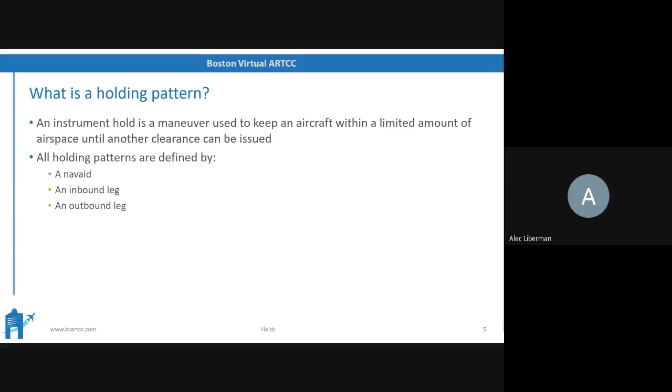Let's talk about the navaid. A navaid is a navaid like in any other kind of flying. A VOR, so a ground station, an NDB, another ground station, an intersection of two radials, a DME fix, an RNAV waypoint, all depending on what kind of equipment you may have. Generally speaking, holds for instructional purposes are depicted via a triangle, so that's what we're largely going to be using today.

Now let's talk about the inbound leg. The inbound leg is what all hold instructions are centered about. You always fly to the fix on the inbound leg. That should be pretty common sense. Inbound to, outbound away from. And the inbound leg is always the navigational guidance. And we'll talk about that in a few more slides as well.

The outbound leg, on the other hand, you're flying away from the fix. And this one you actually fly by dead reckoning. There's no navigational guidance. You have to guesstimate this one and then adjust for wind and time it properly so that you're always tracking the navigational guidance on the inbound leg. And we'll discuss how to do that in a few more slides.

Is it always on the right or on the left? Say again? I'm looking at traffic patterns. Usually they're on the left. So is this one always on the right, or it doesn't matter? So good question. We are going to talk about non-standard holds, but conversely to traffic patterns, standard holds are always flown with right turns, and non-standard holds, if specified left turns, then you fly them to the left. Otherwise, you can expect standard holds to be to the right. Okay. I don't have a reason for that. I don't know why, but that's just the way it is.

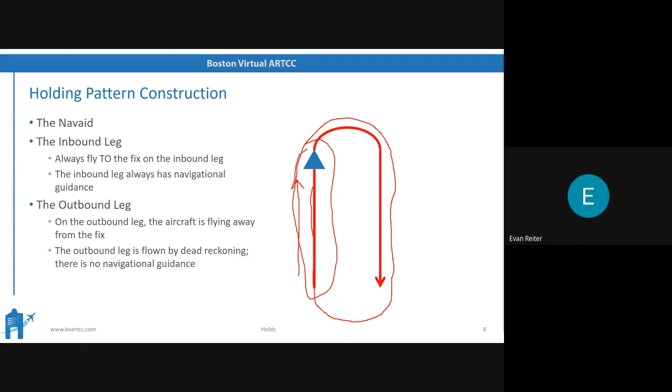And there are different techniques that we're going to cover in the next several slides that talk about how to pick that outbound heading so that you do end up on the exact inbound leg that you want to fly.

All right, let's talk about holding pattern specifications and the rules surrounding them. As Lane just mentioned, turn direction. Standard holds are flown to the right, and in the absence of any direction, you fly them to the right. Non-standard holds, ATC will specify a left turn, and we'll hear ATC instructions in a couple slides. Inbound time, so the inbound leg that Evan just mentioned, most often, especially for GA aircraft, it's 1 minute. Above 14,000 feet, 1.5 minutes.

And we have speed limits as well. Below 6,000 feet, you cannot fly above 200 knots, 6,000 to 14,000, not above 230, 14,000 and higher, not above 265. That's really only an issue for the airline world. I would be pretty concerned if I got a Cessna Skyhawk up to 200 knots.

And even in the airline world, what we hear quite commonly is airliners will just request their own speeds anyway. And as I said before, as a controller, certainly in the virtual world, it doesn't bother me what speed you're flying. So if I'm going to be flying into a hold, I'm going to just end up there to wait. There's no reason for me to go fast. I may as well slow down.

So typically, one of the first things that we'll do in the airline world when we hear you can expect to hold or here's a holding clearance for you is we'll just ask for speed our discretion right at that moment. And then I'll slow down to whatever a minimum safe clean speed is, because I'm just going to be sitting there burning gas anyway. I may as well try to eat up a little bit more time as I'm on the way to the fix. And again, I don't necessarily have any reason to be operating at 265 knots in most cases. So I might request speed my discretion and just go as slow as I practically can, or as I feel comfortable with doing, saving some gas and avoiding any additional time that I might be spending in the hold.

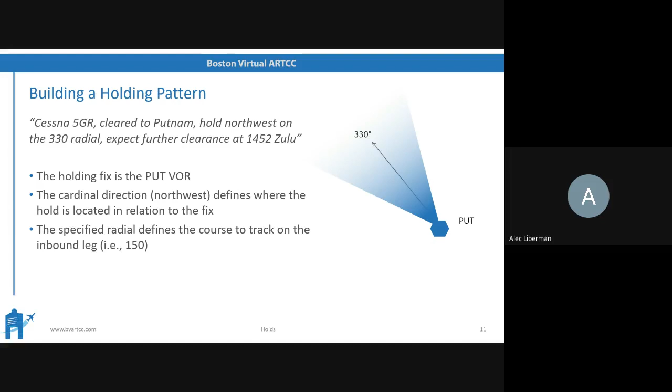Specifically, we know that the inbound leg is the 330 radial. Let me clarify that. If we know that the inbound leg is on the 330 radial, and we're always flying inbound to the nav aid, we know that the inbound heading, or excuse me, track must be 150. And in a no-wind scenario, the outbound heading is 330. In the absence of turn directions, right turns.

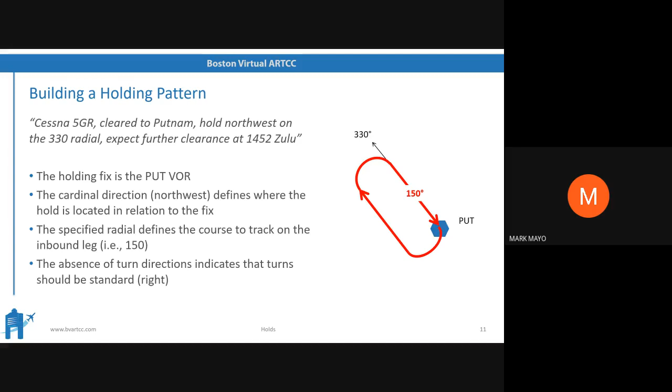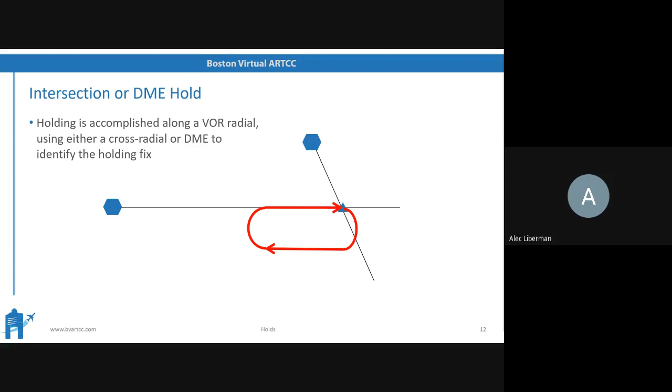Okay. Any further questions on this? If not, we'll move on to intersections or DME holds. This is largely the same principle as a nav aid hold. Only instead of a nav aid, you now have an intersection of two radials, and you just fly to the intersection of those two until your CDIs are centered, and that's what you use as your nav aid. You accomplish this using a VOR radial and either a cross radial or DME to identify the holding fix. There's really no difference between a nav aid and using the intersection of two VOR radials to define a nav aid.

NDB holds. You're very likely not going to fly one of these ever, either online or in the real world, at least within the United States or most Western countries, but they are totally kosher, so we're going to cover them anyway. Holding is accomplished at a non-directional beacon, or NDB, and again, you establish an inbound track to that station. And we don't have a slide specifically on it, but a GPS-based hold, so you've just been cleared to hold at an RNAV fix, is going to be similar to this one.

And what's important to note about an NDB hold or a GPS hold is that we aren't talking radials here. So when you get a holding clearance for a VOR hold, your holding clearance is going to say hold on the 330 radial. Like we talked about with the Putnam example, now we need to be inversing that and go 180 degrees to a 150 heading to find our inbound track.

When you're given a clearance to hold on an NDB or on an RNAV fix, air traffic control isn't going to say 330 radial. They'll make it easy for you, and they'll say hold on the 150 inbound track. So now there's no need to worry about going 180 degrees. You've already been given that piece of information.

And that's the purpose of this slide, and trying to identify anything else when it comes to a regular RNAV fix hold, is that that clearance is going to sound different. We're not talking about a radial off of a VOR where there's a need to invert the number. We're talking about an inbound track. And again, we'll cover that in the future examples we come up with.

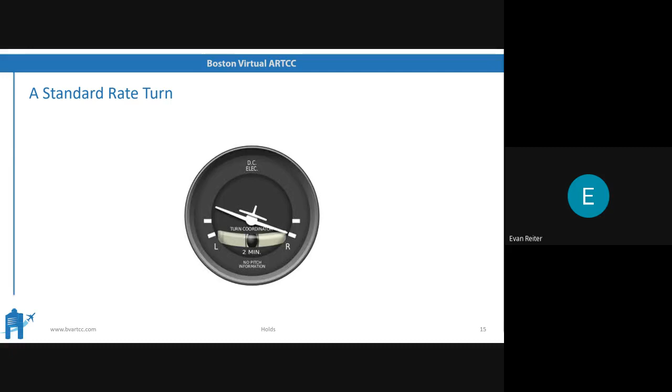And what's the significance of that? In other words, that it will take you a full minute to turn from your inbound to your outbound heading. Exactly. So in theory, everything is 4 minutes. 1 minute inbound, 1 minute to make the turn outbound, 1 minute in the outbound leg, and 1 more minute to turn back onto the inbound leg. If only there was no wind. Any questions on this?

Okay, that was great for a perfect world, and now let's talk about our actual world: wind correction. Wind can have one or both of two effects on your holding pattern. First, a headwind or a tailwind will cause your inbound leg timing to be incorrect, and you have to adjust for that. A crosswind will cause you to undershoot or overshoot the inbound course on your inbound turn, and you have to adjust for that.

So when you fly a holding pattern, there are really 2 corrections you need to make to correct for wind. You adjust the outbound heading to roll out of the inbound turn on the inbound course, and you adjust the outbound time to create a 1 minute inbound leg. So let's recap that. Wind pushes us either toward or away from the inbound course, and also toward or away from the navaid itself. So to account for that, we adjust our outbound course and our outbound time. Any questions on this so far?

Okay, let's talk about wind correction, and more specifically, the heading. We adjust a heading by doubling the crab angle correction maintained on the inbound leg. For example, if you're already flying your inbound leg and you know that you need a 7-degree right crab into the wind, that means on your outbound leg, when you're flying the reciprocal heading, you need a 14-degree crab this time to the left, so you're always crabbing into the wind. And of course, we know about that initial 7 degrees because on that inbound leg, we're tracking a VOR.

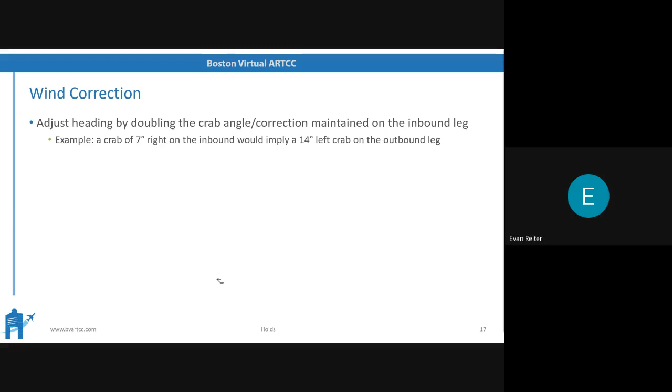Okay. Let's talk about timing. You adjust timing by lengthening or shortening the outbound leg to achieve a timing of 1 minute on the inbound leg by taking 2/3 of the difference in timing. What does that mean? For example, if the inbound leg takes 40 seconds, you need an extra 20. 2/3 of 20 is 13 seconds, so the outbound should be flown for 73 seconds. So you take the difference between your actual inbound and what you want it to be, take 2/3 of that, and then add or subtract it from the outbound.

And as a note here, corrections are much less effective when there's a tailwind on the inbound leg. In those cases, you just have to apply additional correction as determined through brute force trial and error. 1 second of correction per knot of wind component is a good baseline, but adjust that as necessary. So we're going to go through some examples of how to apply these now. So if your brain doesn't hurt yet, it's about to in a couple of seconds.

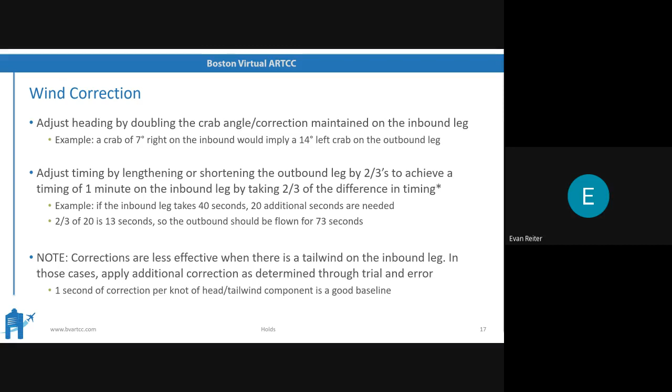But I just want to point out again, coming back to the comments I made at the beginning of the session today, this is stuff that you need for your IFR check ride. It's stuff to make your simming that much better. It's the 95% of making that holding pattern work out perfectly. Does it really matter in the online world? Absolutely not. Whether it's a wings flight or anything else on the network, no controller is sitting there saying, your holding pattern is slightly too crabbed in, doesn't look perfect. We don't really care about that.

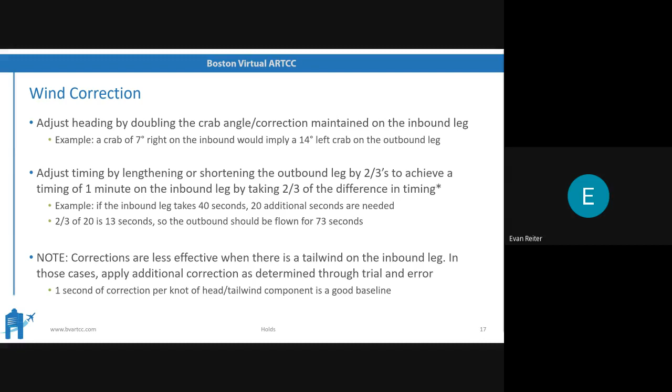We care about what side of the fix you're on, and we care about your altitude. So this is great stuff. And if you really want to refine your flying skills, these are some great examples to go through. But from a really practical perspective, it's not something that you need to be terribly worried about for everyday network flying.

So let's see how much you've been paying attention. Alrighty. This is going to be an interactive question, so I invite a brave soul perhaps to step up and take a stab at this. So, anybody want to be the volunteer here?

I don't bite, I promise.

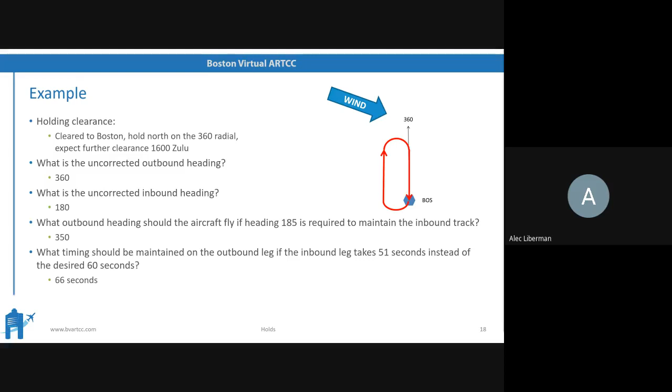Yes, by and large, these are very good rules of thumb. Yeah, these are good rules of thumb. They're not perfect because nothing in aviation is perfect. There's always going to be a little bit of a wind change or a little bit of a wind shear or whatever, but they're very good rules of thumb, and they'll get you, if not exactly there, then damn close enough.

So is it basically always on the inbound that you're going to calculate that? I'm sorry, ask that one more time. Basically, you're always going to calculate that on the inbound portion of the holding pattern. So you calculate everything with reference to the inbound. Okay. Meaning, yeah, you adjust everything so that your inbound leg is perfectly aligned in exactly 1 minute.

Okay. So the end goal is the inbound leg from the time that you roll wings level onto the actual track into the VOR until the time that you hit the VOR is 1 minute. And you're going to fly more or less time in the outbound to make sure that that 1 minute actually happens. Okay. That's clear. Thank you.

All right, next example. You guys ready? This one's going to be a little bit more challenging, because you don't even get a picture on this one. But you don't get a picture in the real world, so you're not going to get a picture now, or at least not yet. Cleared to Putnam. Hold northwest on the 330 radial. Expect further clearance 1452 Zulu.

And Matt asked a question, so calculate inbound and make the adjustments on the outbound. Yes, correct. All right, uncorrected outbound heading. Post that in the chat. Remember, uncorrected outbound heading. Yeah, most people said 330. That's correct. No wind scenario, you're flying outbound on a 330 heading. And in a no wind scenario, what's your uncorrected inbound heading? Yeah, very good. It's 150. No tricks there.

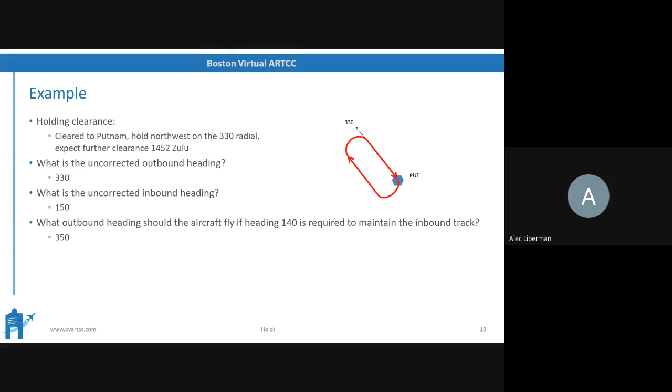Let's talk about timing, unless there are any questions. Let's say your inbound leg actually takes 90 seconds instead of the desired 60, so it's 30 seconds longer than you actually want it to be. What should your outbound leg actually take? How long should you fly for? I'll give it a minute or two, then I'll discuss it and give you guys the answer. Remember, your inbound leg is taking more time than you want it to.

Okay, we see 75, 80, 40, 30, 1.2, I'm assuming that means minutes. The correct answer is 40 seconds. Here's why. If your inbound leg takes 90 instead of 60, that means we are flying the inbound leg 30 seconds too long. So we want to be closer in. So there's a 30-second difference. 2/3 of that is 20 seconds. And because we want the inbound leg to take less time, we subtract 20 from 60. That means we are flying the outbound leg on a 350 heading for 40 seconds. Does that make sense?

I'm assuming that does. So lastly, the question is, from where is the wind blowing? Matt says north-northeast. Anyone else? People are saying north, northeast, east, from the northwest, 150, northeast. Yeah, wind is blowing from the northeast. And you can figure that out because on the inbound, if you're crabbing into the wind, on the outbound, you're crabbing into the wind. You're always crabbing towards the east. So chances are the wind is blowing from somewhere from the east or the northeast. So people are doing pretty well here.

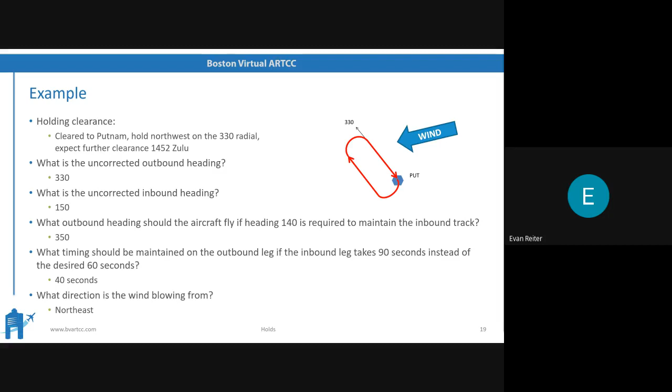Okay. Holds are great. You are in a hold. You guys now know how to fly them. Unfortunately, in real life, you're not going to be flying holds all that much. What you are going to be flying significantly more often are hold entries, specifically hold in lieu of a procedure turn. This is common, this is arguably the more important of the two, so we're going to talk about it. Let's discuss the hold entry. They're relevant not just to hold procedures, but also to almost any instrument approach you're ever going to fly.

3 types of hold entries here: direct, parallel, or teardrop. For what it's worth, I've never heard the term offset before. That might be a Canadian thing, I'm not sure. But the 3 terms used in the United States are direct, parallel, and teardrop. Yeah, you see offset more often in the ICAO world or in other parts of the world, which is why I threw it on there in case you hear that from any of your European or Canadian controllers. Gotcha, yeah, I've never heard that one before.

So, unless otherwise instructed, you have to report the time and altitude the first time you cross the holding fix as part of the entry, or when leaving any assigned holding fix or point. Any questions there?

And I'm sure it comes up later on, but I will point out, I think I said this earlier as well, these are only recommended hold entries. So there is no, now correct me if I'm wrong, there's no regulatory requirement that says you're on this side of the fix, you must fly a direct entry. It's simply a recommendation based on the safest and most organized way to get into the hold.

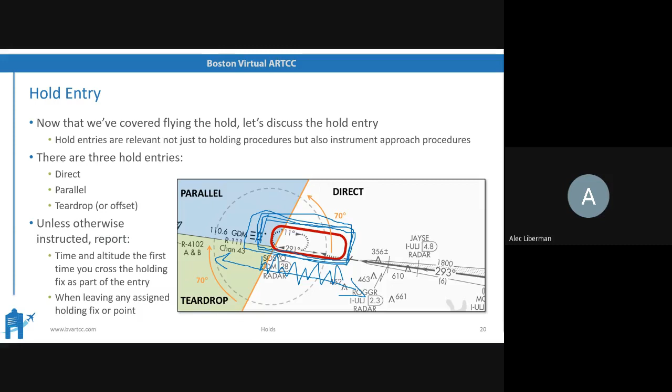Yeah, true. Derek asks for a teardrop example, and don't you worry, we are going to draw an example for each of these.

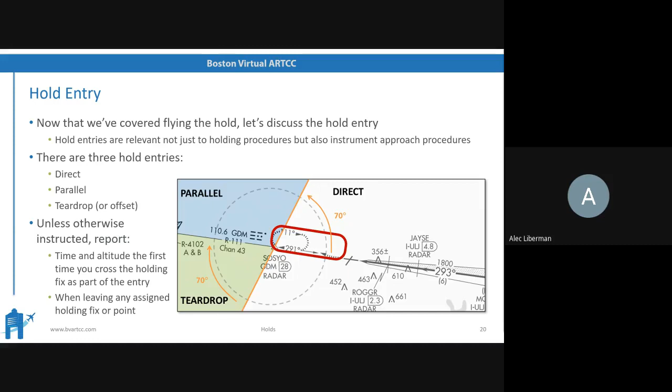Let's talk about a direct entry. Direct entry, you just cross the fix and you begin the normal outbound turn. This is the simplest possible entry you can have. This is where you are already either lined up or close to lined up with the initial inbound course, so you can just fly direct to the fix and then turn outbound. Easy enough.

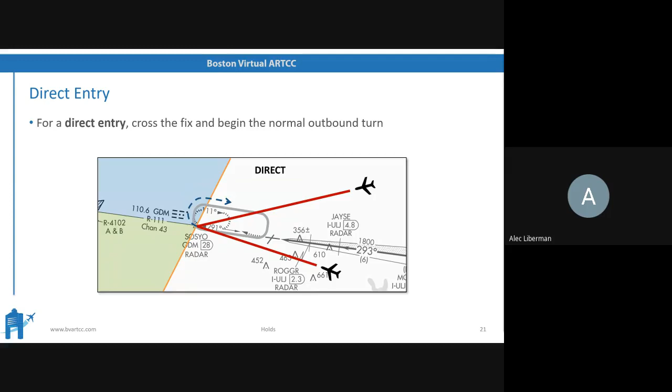Parallel entry. You're on the protected side already, but you're flying the opposite way. You're basically flying what's close to the outbound heading. So remember that we always want to start on the inbound heading, or the inbound leg. So we have to make a 180-ish to return to the inbound track. So for a parallel entry, you cross the fix and turn outbound to parallel the inbound course.

After 1 minute of doing so, you make a left turn towards the hold and intercept the inbound course, track it, and then start turning to the right, in this case, to just the normal hold that we discussed in the earlier slides. So drawing this out, effectively you're coming down here. For just a second, of course, you're going to go on to that other side of the hold, but now we're going to make this big looping turn back around, and there's some argument as to whether you're supposed to come back in here and re-intercept, or if you can just go direct to the fix.

But either way, that's what the entry looks like, and now once you've done the entry, you're effectively just in the hold. And now, of course, you're just flying your holding pattern as you would if you had done a direct entry. Yeah, there's an argument, for what it's worth. The way I've been taught and the way I teach my students is you turn left to re-intercept the inbound leg, and then you don't fly just direct to the fix. But again, these are all recommended entries, so there's no clear-cut answer here.

Mark asks, isn't it dangerous to be flying parallel to the pattern? Not necessarily. Number one, air traffic control probably assumes that you're going to be doing a parallel entry. And number two, you're already cleared for that hold. So you're cleared for that altitude, that protected side, and the inbound leg area is yours. So if you're flying outbound on where you would be flying the inbound leg, theoretically, there's no one there anyway. Does that make sense?

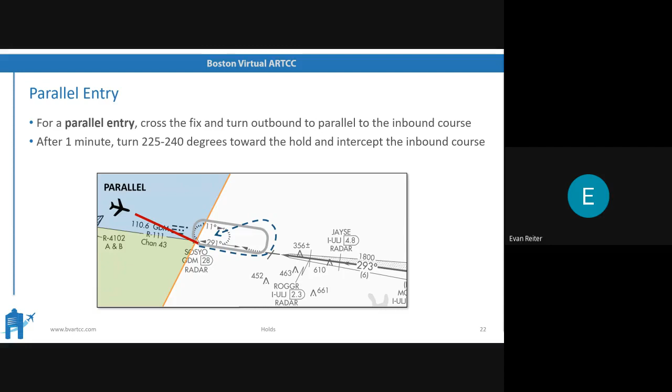Alrighty, let's talk about the teardrop entry. Teardrop is when you are on the unprotected side of the hold and you need to make a 180 to get to it. So you have to cross the fix and get onto the protected side. It looks like a teardrop, hence the name teardrop entry. Cross the fix, turn to heading 30 degrees from the outbound course on the holding side, and after 1 minute, turn towards the inbound course to intercept. Any questions here?

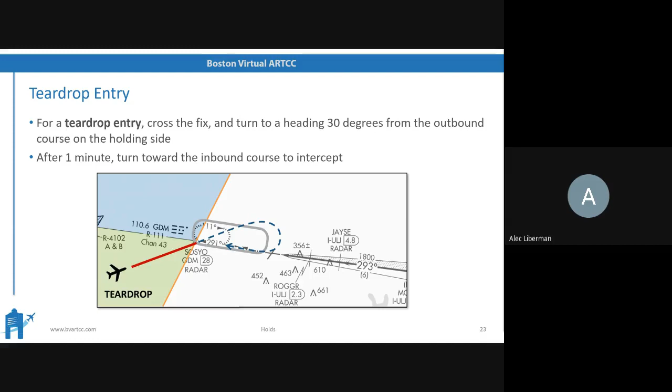Okay, here's the hard part. We're getting to the examples. Hold entry. Cleared to Putnam. Hold northwest on the 330 radial, right turns. Expect further clearance 1452 Zulu. Here, right turns is unnecessary because all turns are assumed to be to the right, but they're just a simple reminder here.

So, here's how you actually determine it. Pretend you're currently flying due north. Start with your current heading. Identify the outbound, that's 360 in this case. Number 2, identify the outbound track that you want to fly. In this case, it's a 330 heading, so therefore your inbound is a 150. Segment, quote-unquote, your heading indicator, so break it up into 4 quadrants.

4, turn the horizontal segment 20 degrees in the opposite direction of the turns in the hold. So in this case, it will be 20 degrees left. So we got right turns here. So we're just talking about moving this imaginary red line that we've got, the one that's right here, 20 degrees to the left. And then determine which of the segments your outbound track fits into.

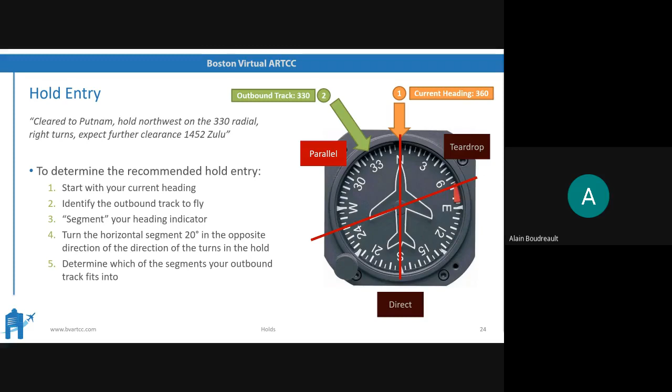Segmenting the heading indicator. So for a standard with right turns, you draw basically 2 lines: the vertical one and the horizontal one. Turn the horizontal one 20 degrees left, in this case 20 degrees counterclockwise. And there are your 3 sections. The smallest one's the teardrop, the second smallest is the parallel, the biggest one is the direct.

Non-standard one with left turns. Again, draw the cross. Now turn it 20 degrees to the right in the clockwise direction. Smallest one's the teardrop, middle one's the parallel, biggest one's the direct. That's an important one to remember: which one's the smallest, which one's the middle, which one's the biggest.

When you start to segment the heading indicator, notice how they flip in some ways. So here on this example, the P is on the left side because we have segmented the opposite. Here the P is on the right side. But again, the key is that the P is always the middle one, teardrop is always the smallest, and then the direct is always the biggest.

Alrighty, we're going to move on to some examples now. These are going to be a little tricky, but we'll get through them together, I promise. Alrighty. Well, and yeah, there's the outbound track and the inbound tracks there. Just a couple examples of where the different entries might fall is all we're going for here.

Let's draw it. Aircraft heading is 200. Your holding radial, Nantucket 240. You draw the outbound course, which is 240. And you know that your left turns are non-standard, so you rotate the horizontal line 20 degrees clockwise. 240 is in the parallel sector, the middle one.

And so here we've thrown a trick at you a little bit, because if we were dealing with standard turns, and with the pictures we've seen on the previous few slides, then this would be the parallel sector over here. We would have rotated this guy like this. The parallel would be the big side. And so again, this would be what you'd be looking at in most cases. But we're not in that scenario today because we've got left-hand turns in this example. And there's your parallel entry.

We know this is a lot, so we invite you guys to ask questions if you're feeling confused at all, because I know that I was totally out of it. I had no idea what my CFI was saying when I learned all this stuff, so I invite you guys to ask those questions now if you have any.

Mark says, I thought the radial always referred to the inbound track. It's actually, yes and no. The radial refers to where the inbound track is, but you always have to think of relation to the VOR. If you're flying on, in this case, the 240 radial, that's southwest of the VOR. If you know that you're always flying on the inbound track, then you have to take the reciprocal of the radial. So in this case, it would be 060.

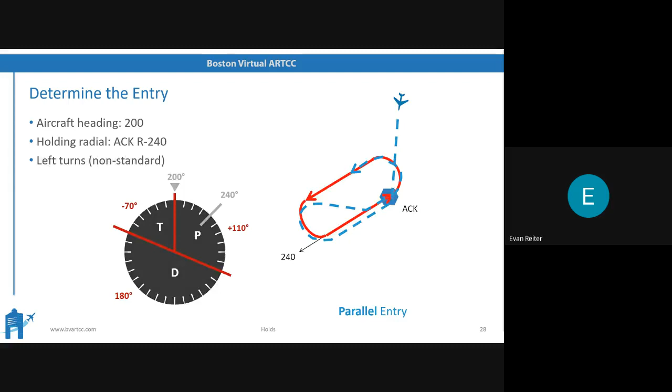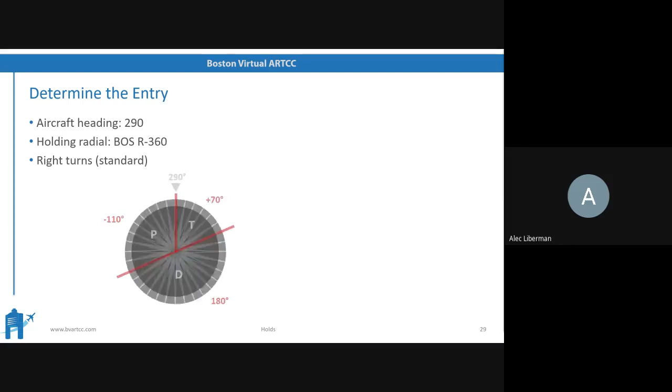If we draw the 290 heading up at the top, rotate a 20-degree horizontal line 20 degrees counterclockwise, and we draw the 360 outbound course, that ends up on the line. So it's within 5 degrees of the boundary, so either a teardrop or a direct works.

Honestly, I would probably choose a teardrop here personally, just because I don't want to be cranking about a probably 120-degree turn to the left and then immediately have to start to fly one to the right. So I would probably do a teardrop here, but that's just me.

Honestly, I would probably cheat and do what the airplane does and just fly for a split second more past the VOR and then turn into the outbound heading and hope for the best. Yeah, fair enough. But I'm lazy.

I agree that teardrop is probably a more organized way of doing things because you're going to effectively end up almost doing very similar to what you see in this picture. Your true teardrop is just going to take you out here, and then you're a little bit more established versus, as Alec says, to do a true direct entry, you'd have to crank it down here and crank it over here pretty quickly. The reality is you're going to end up doing some weird thing that looks like this and probably end up way out here.

Can I draw the teardrop? Yeah, let me draw that again. So if you were going to, it does actually look quite similar, but effectively for the teardrop, you're going to want to pick a heading that is 30 degrees offset. So 330 is my heading. Fly that heading for 1 minute. You're going to end up right about here. And then at that point, you make a sweeping right turn to intercept the inbound radial, flying on a roughly 180 heading back toward the holding fix. Any questions on this one?

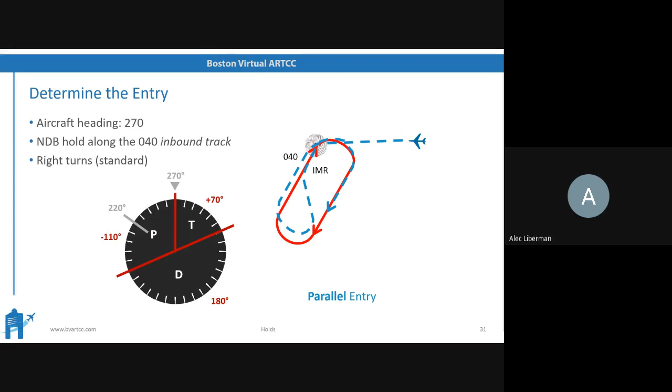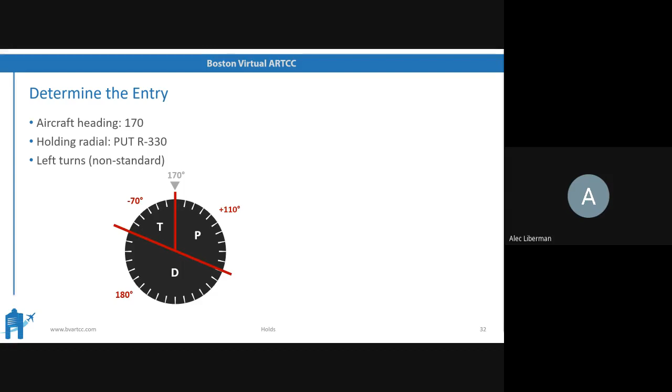Let's talk about it. 170 is up at the top. Ooh, one teardrop. Let's spice it up a little bit. 170 is up at the top. The outbound course here is 330. Draw that on the heading indicator. It's going to be at the bottom. So you are, in fact, flying a direct entry.

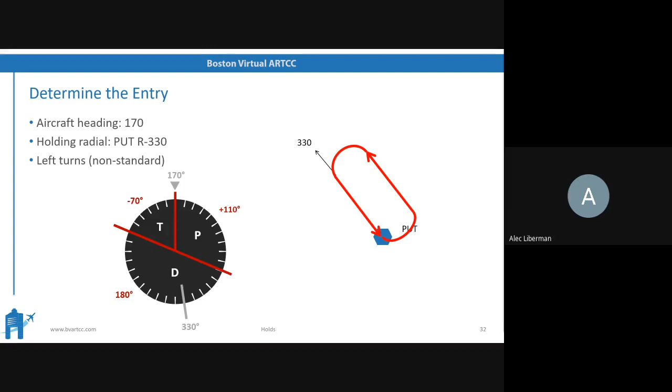Does anybody have any questions on hold entries? Because that's all we're going to talk about them for now. I'll give it a couple seconds for people to type out questions, or at least say they have them, and if not, we're going to move on. Okay. Can you go back to the one that should be right? I think that was this one. Yeah. Don't want to spend too much time on this slide. I know we are a couple minutes over as well. There's just a couple slides left once we're done here.

Would teardrop be a bad entry if that is using left? I'm kind of confused by that question. Oh, I see what you're asking. Yes. If the slide is in fact messed up and you're using the left turns, in that case, yes, it would be a teardrop entry. So I think what's happening here is just the slide where it says right turns should say left turns. The actual picture that you see is appropriate for a left turn entry. This heading indicator is segmented for left turns. This picture's for left turns. This should just say left.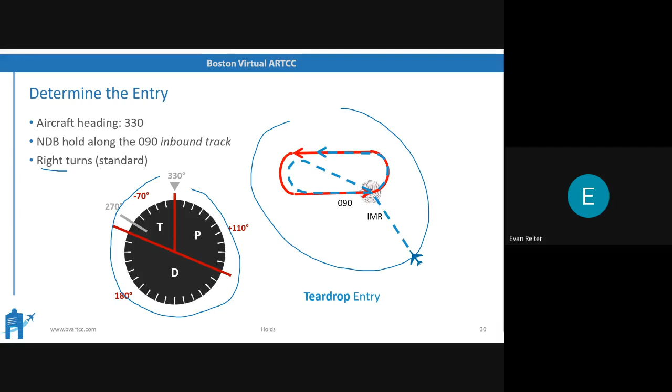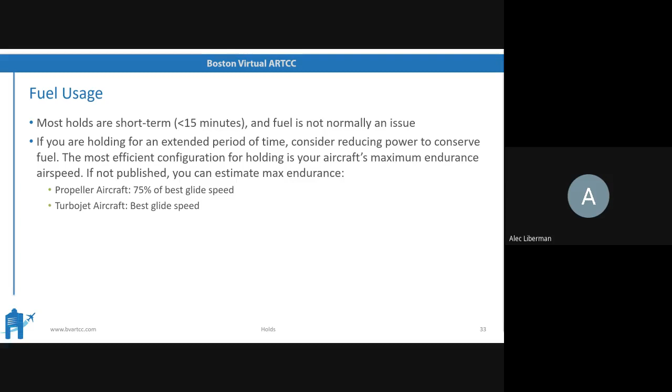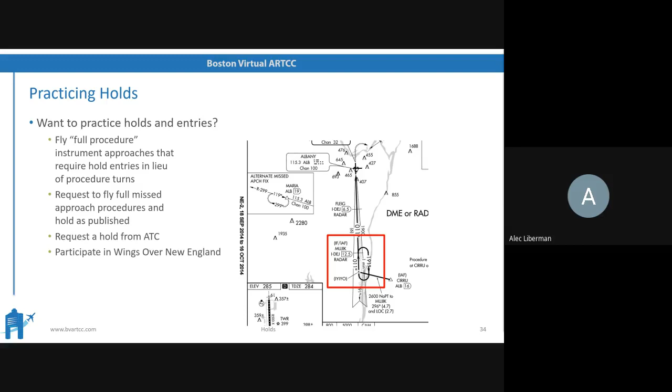Does anybody have any questions on anything we have covered so far? Assuming that is a no, thank you very much for participating in tonight's ground lesson on holds. We know it was tough. This is probably the most nuanced topic we're going to have in this ground school.